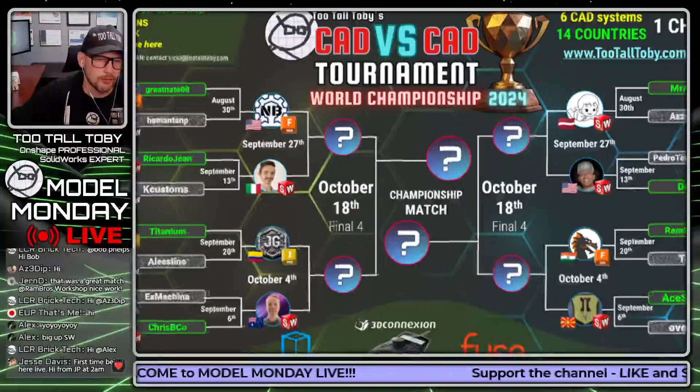We had Titanium coming through with Autodesk Inventor. We saw Ram Bros, who's in the chat here today, coming through with Fusion 360. Both matches went to 3 matches, so both were really good, really fun to watch. I was very thankful to have been a part of that and to have been able to do co-commentary with Neil Cross, who's an Autodesk expert elite. So it's pretty cool to have him in the booth with me.

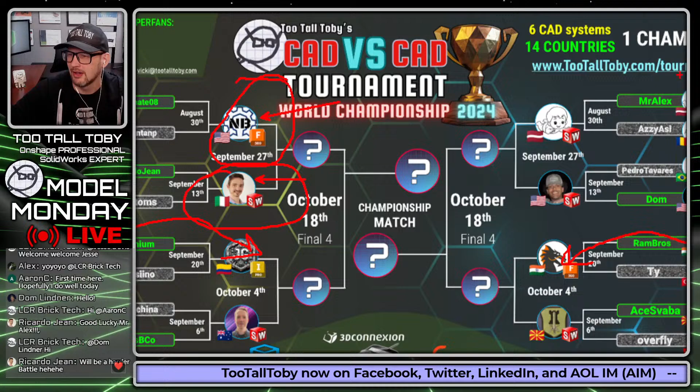That's going to move us forward to this Friday, September 27th. Great Nate 08, who's the #1 seed, going against Ricardo Jean, who I'm definitely rooting for. I know we're not supposed to play favorites here in the commentary booth, but Ricardo, I'm rooting for you, bro, you got to bring this home. So good luck to both of our runners here, it's going to be an awesome match regardless. Ricardo is so fast, super speedy, puts up some of the fastest times, but Great Nate 08 is a Fusion 360 wizard and was #1 seed in the tournament.

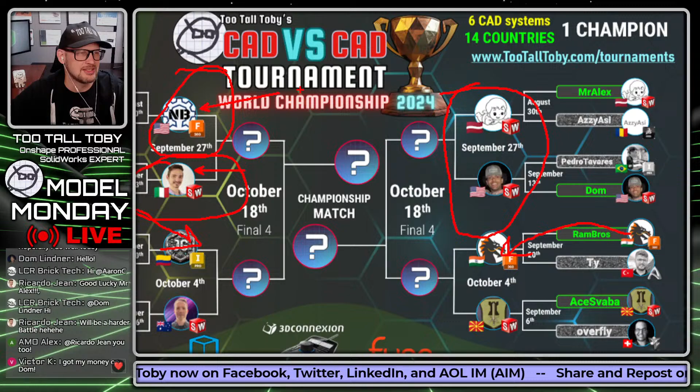So this match this Friday is going to be absolutely epic. And then we got Dom versus Mr. Alex, it's going to be another great match. What a great Elite 8 this thing is shaping up to be. I'm very excited to see the matches this Friday. If you guys don't have it on your calendar already, you can visit TooTallToby.com/calendar and get all those dates added in.

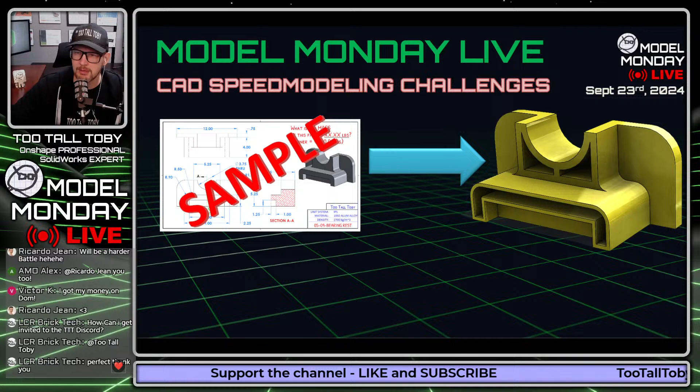All right, guys, I know what you're here for. You're here for the Model Monday Live 3D CAD speed modeling challenges. How fast can you take a 2D drawing and turn it into a 3D model? Well, you can prove the answer to that question by doing just that, calculating the mass, and then entering that mass in the YouTube chat. This is what we do every Monday on Model Monday Live.

It's a lot of fun. It's a great community. And the basic rules are that you can use any 3D CAD package as long as you can input density and output mass. All CAD are welcome here at TooTallToby's Model Monday Live. Make sure you use the specified precision that's shown on the print, and the first person to answer correctly in the chat will be declared the winner.

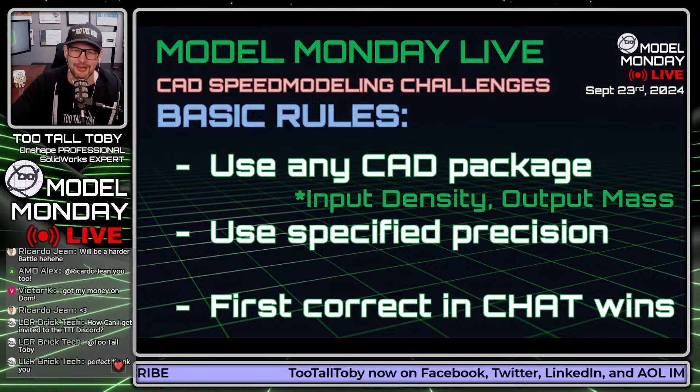Of course, if you're not sure if your answer is correct, you can always correct your answer. You can always change your answer. You can enter more than once, more than twice, as many times as you want here on Model Monday Live. Whatever your final answer is, that's the one that we're going to take.

The units that we use here on Model Monday Live are shown on this screen. If you're here for the first time, take a moment, grab a screen capture. That way you can make sure that you get the correct units, the correct density when you're creating your models. So make sure that you get those correct, all that information correct. Take a screen capture, then you'll have it for the future.

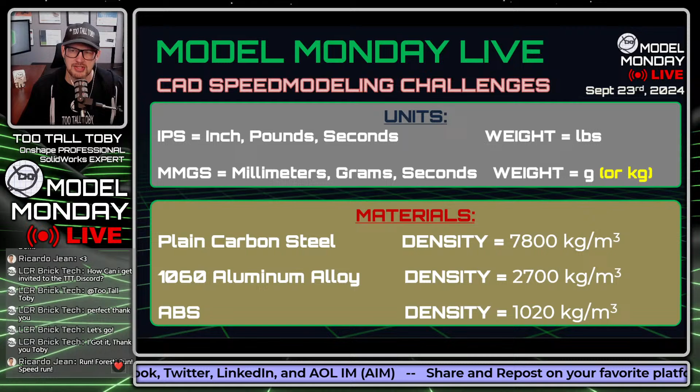LCR Brick Tech was able to get into the Discord. Good job, LCR Brick Tech. Good job. He's in.

Guys, the advanced rule is this is meant to be fun and good-spirited. Occasionally, I will make some mistakes. I will sometimes do things like forget a dimension on the print or have the wrong density listed, stuff like that. If that happens, then you know what? We just cracked it together. We figured it out together. That's how we do it.

And the Ivan exploit is permitted. I'm working on a video with Aaron C., one of the super fans of the TooTallToby channel, great friend of the channel. And we're almost done with the final edits on that Ivan exploit video. It's going to be coming out any day now, so be on the lookout for that. I just had to send the raw video over to Aaron to get him to do some color grading, and then that video is going to be out. So really looking forward to that Ivan exploit video. And a huge thanks to Aaron C., who's helping me out with that one.

All right, guys, that's it. That's it for our warm-up here. As soon as I show this 2D print, you guys are going to attempt to turn it into a 3D model. So give it a try here.

Ex Machina says in the chat, ASMR, TooTallToby, let's go. I guess that means the mic sounds good today. And we got Aaron C in the chat, Aaron C is actually the one who helped us code the Venmo interface at TooTallToby.com/donate, so huge shout out to Aaron C in the chat, already coming in with an answer, he's speedy. And we got Eric Gauthier in the chat, haven't seen Eric in a long time. Hello, hello, old friend who uses Onshape and does mobile Onshape for the speed modeling challenges, pretty cool to watch. And we got Juliano Rafael in the chat, says I'm here for the first time, I use T. Nice, I use Onshape. There we go.

Is there any other way to see all your projects online and work online? Nope, there's no other, you got it. You got the one that you need, Juliano. That's the one. Juliano Rafael is locked in on Onshape.

All right guys, we see in the chat a bunch of answers coming in now. Aaron C says, first time I ever used the dome tool in competition. Nice, nice. Paul Marsamon coming in with an answer.

New name here in the chat. Welcome, welcome Juliano, welcome to the channel. Thank you for joining us here today.

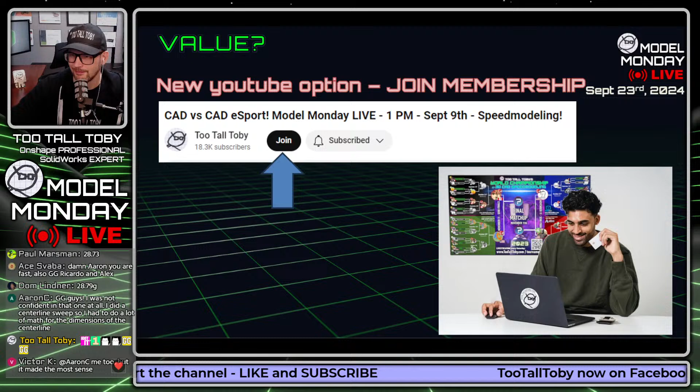Yeah, mine didn't even come in. Where's all my emojis? Oh, they came through. Yeah, they're good. It's weird, it didn't come through in the main chat for me.

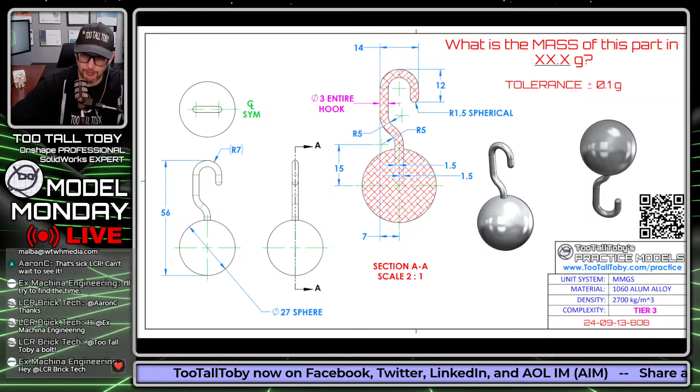Bob, 240913, Bob. Now why this model? Why are we doing a pendulum here, Pendulum Bob? Well, as you guys know, a couple of weeks ago we had a special model for Rich Penn because Rich Penn joined our membership program. And this week we had another member join, and his name was Bob. So I'm kind of doing a thing where the first 5 or maybe 10 people who join the membership program, I'm going to create a special practice model for you.

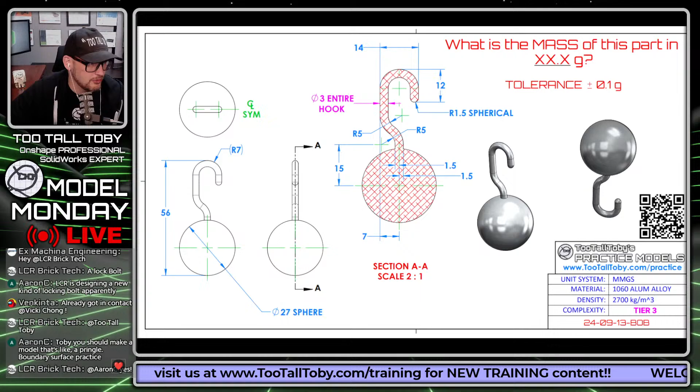Let's see who came up with the first correct answer. I know Aaron C was pretty speedy in there: 28.7 grams. Is that correct or incorrect? We don't know yet, let's find out. Ricardo Jean, hot on his heels, 28.7 grams. Victor K, the world champion, 28.7 grams.

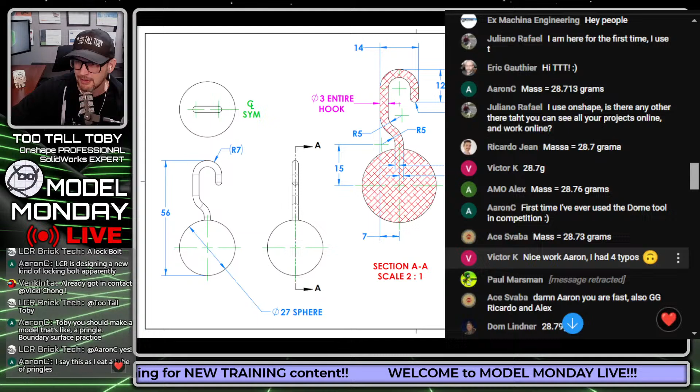Mr. Alex in the Elite 8, 28.7 grams. Ace in the Elite 8, 28.7 grams. Dom in the Elite 8, 28.7 grams. Wait, is Dom in the Elite 8? I think he is, hold on... yeah, I remembered, didn't have to go back and look. Let's see here, what else we got? Ram Bros in the Elite 8, 28.7 grams. This truly is where the world champions come to work out their material.

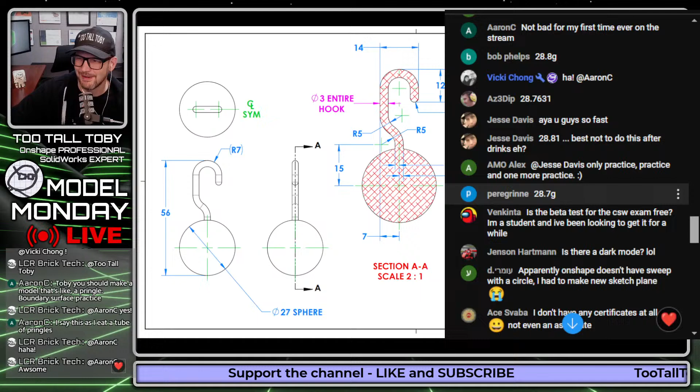Omri, 28.8 grams. Bob Phelps, 28.8 grams. AZ3 DIP, 28.7 grams. Jesse Davis, 28.8 grams. Peregrine, 28.7, nice. Jern, 28.7. LCR Brick, 1064 grams, yeah I like it, heavy, very nice. And Fewer Frosh, 28.6 grams. Very nice. And LCR Brick Tech, 2875 grams, 287.

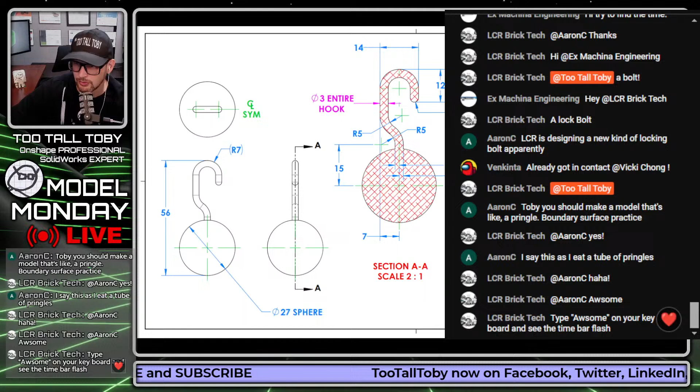You can answer as many times as you want, guys, don't worry, you get as many shots as you want. All right guys, what is the correct answer for this one? The correct answer is 28.7 grams. So GG to Aaron C, very nicely done, Aaron, very speedy. I'm impressed, we gotta get Aaron C back in the tournament. GG, well done my friend, and congratulations to Aaron C, smashing that one. Well done.

Now guys, speaking of the tournament, we had a leftover model from the Sweet 16, one single leftover model, and guess what, that's going to be our model today. So here we go, this second 3D CAD challenge amongst you chat pros. Many of you are in the tournament this year, but not Aaron C, but he smoked everybody, let's see if he can do it again. Here we go, this next CAD challenge begins in 3, 2, 1, go.

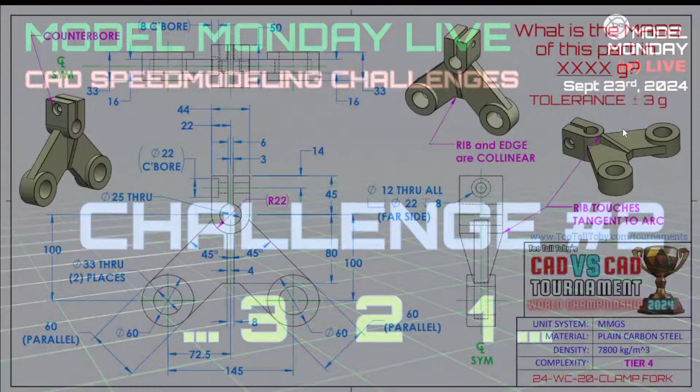What is the mass of this part in XXXX grams? You guys can see here, this part is called clamp fork. I like this one, clamp fork. And this is MMGS, plain carbon steel, 7,800 kilograms per cubic meter. Tier 4 model, symmetric, it's got a counter bore, it's got some Toby notes, as Rich Penn says, Toby notes. Good luck to you guys, this is kind of a fun one.

Omri in the chat says, I wonder where that extra 0.1 grams were. The model had a tolerance of plus or minus 0.1. I think it's probably when you sweep, if you do the merge tangent faces versus not merge tangent faces, that's where you can get some variance because it converts the path into a spline. That's usually where we see that variance on a model like that. That's the problem with sweeps, if people are doing merge tangent faces, you can get a little dicey, get an unfair result. We had that happen last year in the World Championship with Aaron and Victor and Ivan the Reasonable.

So good luck guys, take a screen capture so you can model this while I'm modeling, actually. I want to make sure we have enough time to show off this double CAD project, so take a screen capture. Good luck with this model, tier 4 model, a little bit more complicated. It's got that Toby note: rib touches tangent to arc. What's that mean? Oh, that means we got a plus or minus 3 gram tolerance. That's what it means.

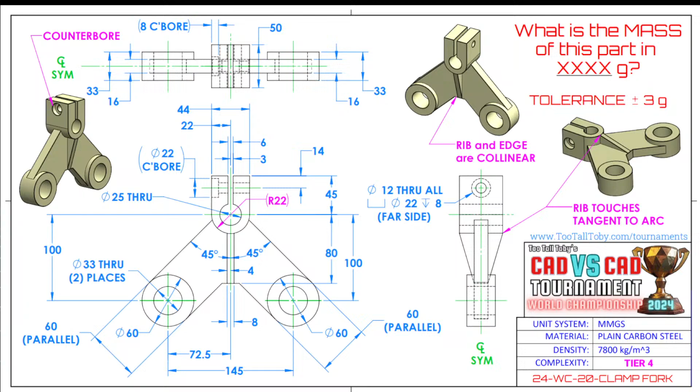Good luck, everybody. Good luck. It's going to be a good one.

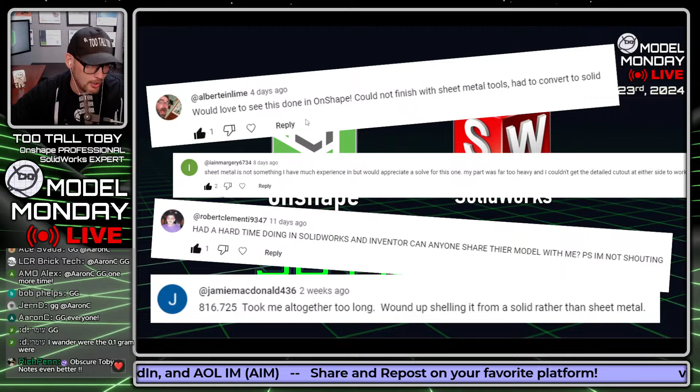Well guys, let's see if we can solve this thing. I'm not sure who's using Onshape, I'm not sure who's using SolidWorks. So you know what we try to do here at TooTallToby? We try to give you everything that you could possibly ask for. Let's see if we can speed model this in Onshape and SolidWorks in the next 20 minutes.

So normally what I do in a model like this is I really talk through my game plan. I'm not going to quite go that deep with it this time, I'm just going to jump into it and do the live solve. But I will say this: when you're looking at sheet metal, it's a really good habit to get into thinking about how you could create thin wall geometry and extrude it to create your first feature.

So if I were to create two lines here, a line going down, then a line going forward, I could extrude that as a thin feature or as a sheet metal feature. That's going to really set me up for success.

So the question is, what does that dimension need to be? I think that dimension needs to be the dimension to these two vertices. I think what I need to do is make my first sketch a line here, and then extrude it out to the depth of those two vertices, which is 80 millimeters. So this dimension here, 80 millimeters, that's going to be my first sheet metal feature.

And if you can get in the habit of looking at a complex sheet metal design like this and figuring out which feature can be created and extruded out as your base flange, you're going to be in great shape.

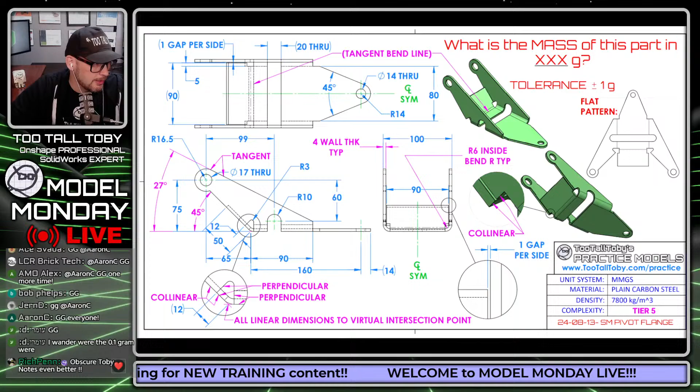If I look at this from the side, that's going to be my profile that I'm going to extrude out. And really, a lot of times the magic in sheet metal is figuring out what the depth of that profile needs to be. But it's kind of the same idea here.

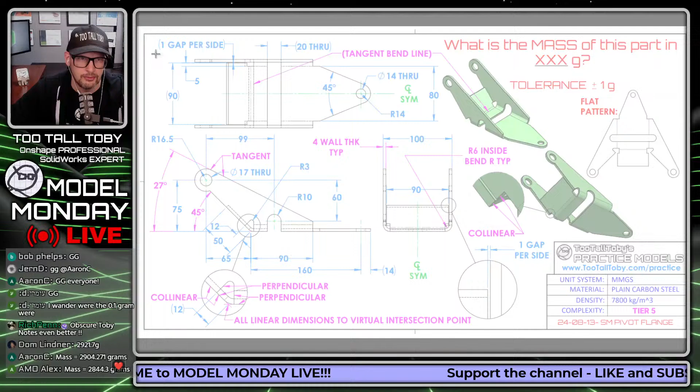We're looking at this model and we're trying to figure out where we can sketch a couple of lines and then use those lines to create a base flange tab. And if we can figure that out, that's going to really set us up for success in sheet metal, regardless of whether you're using SolidWorks sheet metal or Onshape sheet metal.

So I'm going to take this and move it over to my second screen, and we're going to do a live solve here using Onshape. Let's jump into it here in Onshape.

We're going to say create document. We're going to call this 24-08-13-SM pivot flange, this way it will be searchable. I am going to make this a public document, so later on, if you guys want to see this actual document, you can search for it, because everything we do in Onshape is online.

It's entirely in the browser, so you can search for this whole setup when you're done.

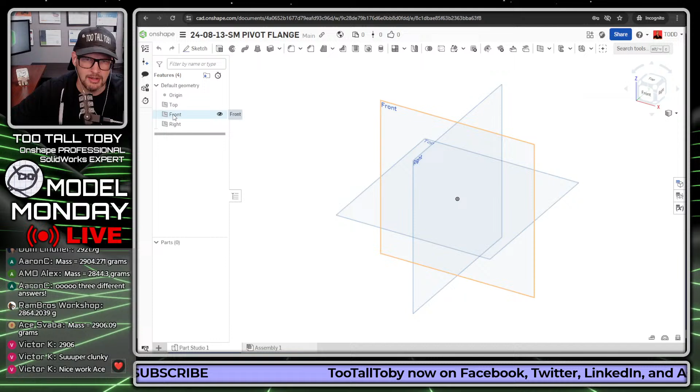What I'm going to do is go into my workspace units and make sure I'm working in millimeters and grams, and I am. So now I'm going to go to the front plane, press S key to begin a sketch, get normal to it with the N key, then S key again.

I'm going to create a line that comes down here at a length of 50, and then a line that comes across here. This distance is going to be 160, plus 14. Where I'm getting that number from is this dimension here.

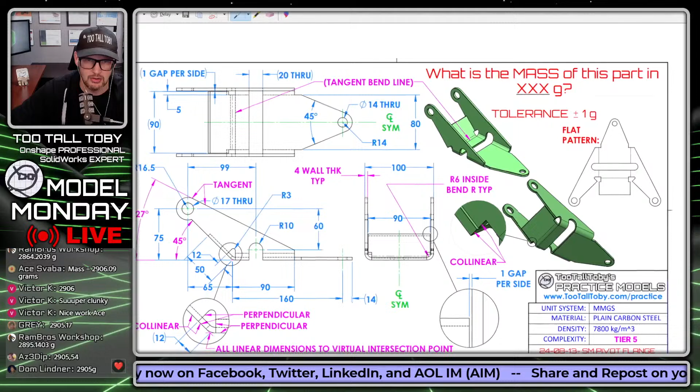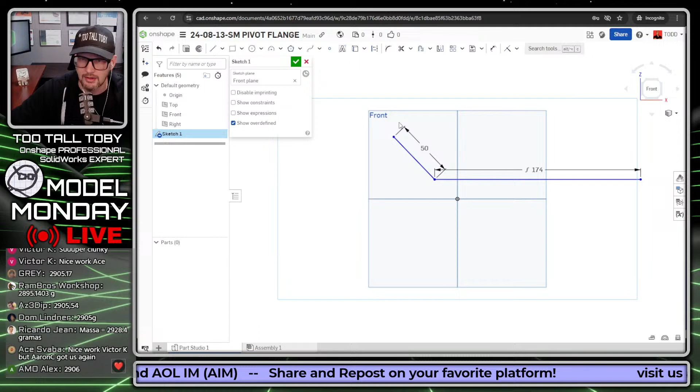So 160 plus 14 — I'm going from this vertex. It says all linear dimensions are to the virtual intersection point. So this dimension here, 160, is from the virtual intersection point, and this dimension here, 14, is the radius sticking off from that center line. So I'm going 160 plus 14 to get the length of that first line — 160 plus 14, 50 up in that direction.

And then we're just going to take this point that's intersecting there and drop it on there. We're going to go to... you know what, guys?

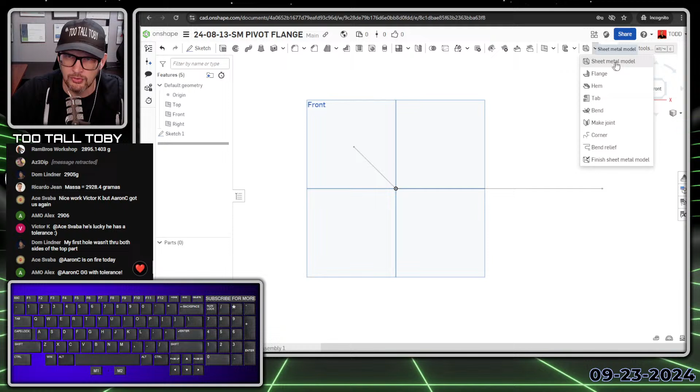Then I'm going to go to my sheet metal tools in Onshape. Your sheet metal tools are found up here — here's the fly-up menu for all your sheet metal tools, sheet metal model, and this is going to be an extruded sheet metal model. So I'm going to pick this here, and that's going to get extruded.

The thickness of the sheet metal is 4, the bend radius is 6, and there's a button here you can use to reverse direction. So I can reverse direction to have that sheet metal go to the other side.

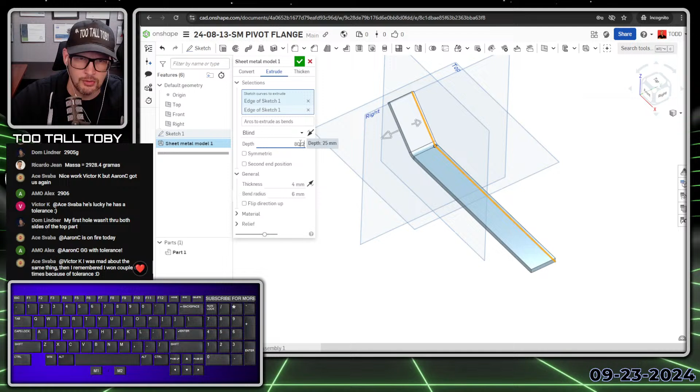The final dimension I need to figure out is what the depth of this extrusion is. Well, that's going to be my 80 divided by 2 — that 80 dimension we identified earlier as we were setting up this model. So that's going to be my very first feature.

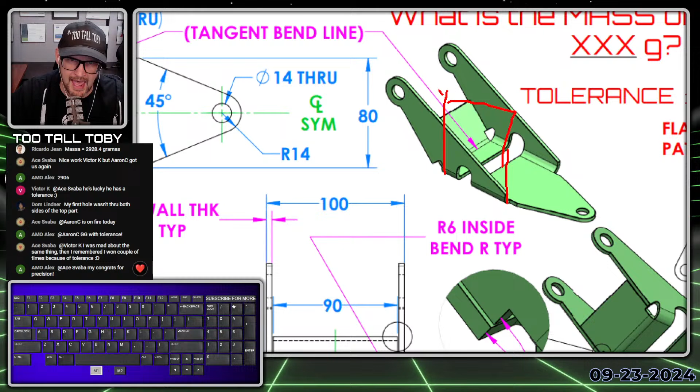Now for my second feature, I'm going to pull this flange off here. Now, I'm not an Onshape expert — I am an Onshape professional, but not an expert. I don't think you can pull this flange off and edit the sketch all in one command. So I'll probably need to bring this flange off straight, then add additional geometry with a tab, and maybe cut away extra geometry on this side with a cut extrude. That's fine, we can do that — it takes an extra step, but it's not a big deal.

So I pick this edge here, S key. I've got my edge flange built into my S key menu in Onshape to save some time — very helpful.

When you're creating flanges in 3D CAD, the main thing you have to recognize is that the flange can begin at different locations. You see how when I choose these different options here, the flange pulls off the solid material in different locations? You've got to get that right, because we're trying to create it so that it's starting at that 80 millimeters and then bending out.

So in Onshape, that's called the hold line. Now for the height of this flange, similar to what I did with the length of that first line, I'm going to identify this 75 millimeter dimension and the 16.5 — 75 plus 16.5 is going to give me the max height of that flange.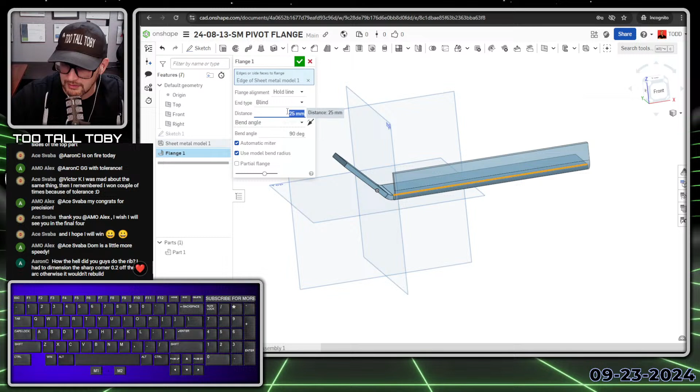So we're going to come over here and say that we want that height to go to 75 plus 16.5. And there we go — that gives us that flange.

Now we're going to begin a new sketch on that flange face, and we're going to create the remaining geometry for this area of the model. So this is going to be that 16.5 times 2. The height of this is going to be from this point here to that origin, or to that point there.

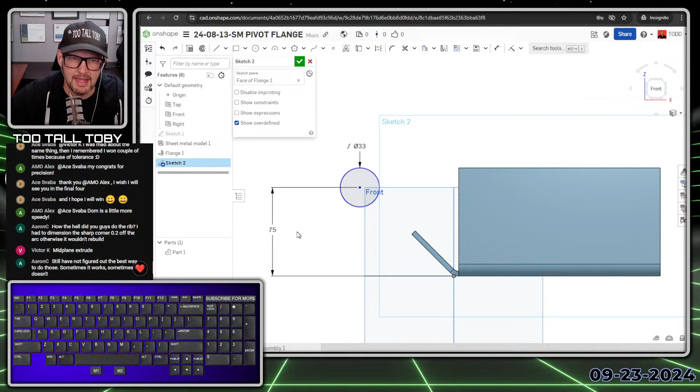It's going to be at 75. Really, I should right mouse button on that dimension and say change this to a driven dimension, because this and this should be tangent. So I'll press T to make that a tangent relationship, and then I just need to define the location in this direction. So the location in this direction is going to be 65.

There we go. And then I can add some additional information here. I like to add additional information into my sketches in Onshape. I think Onshape does such a good job of letting you work with multi-body, multi-contours. So really, I could just sketch all this geometry down to here in that one sketch in Onshape, and then kind of tidy it up as I need to.

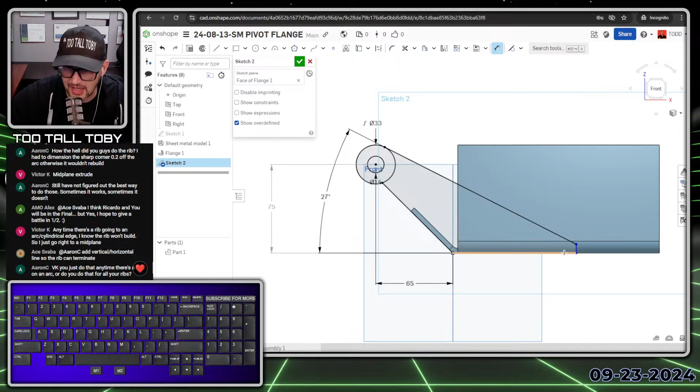So for example, this is going to be collinear. This is going to be tangent. And then this is going to be at an angle here of 27 degrees. So you can see how the sketch is really coming together. This length here to that flat spot is going to be 90.

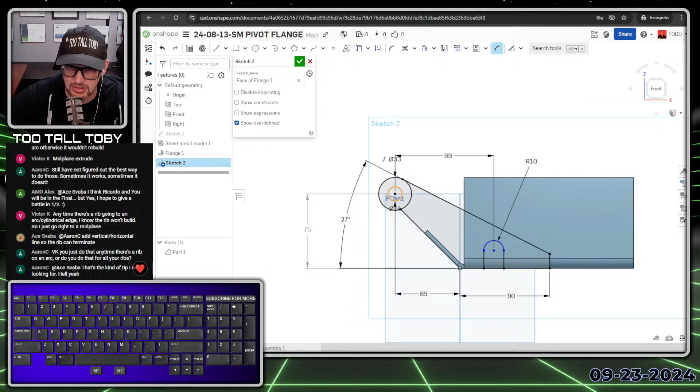I could even incorporate the kind of tombstone shape here in this first sketch, since that tombstone shape is related to that hole. It's defined by that hole. So this tombstone shape here, it's got a radius of 10, and then it's got a distance dimension from that hole to the tombstone at 99, and it's got a height dimension here to, let's see here, 60.

And so the final thing I need to do with this is just create that extra geometry that's kind of sticking up and over here. So there's a line that comes up, comes back and touches the end point. There's a radius here of 3, and then there's a vertical line that goes up and connects to this. And that is going to be tangent.

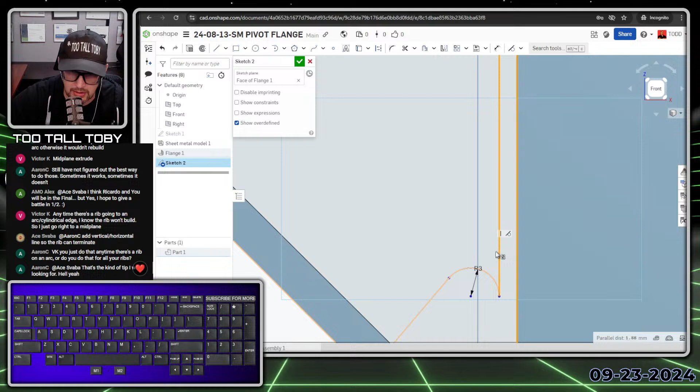So we'll make that tangent. This is going to be collinear. This is going to be perpendicular. Not sure what the shortcut key is for perpendicular, so I'll just make that perpendicular like that. And then there's going to be a linear dimension here from this point to this line. That linear dimension is going to be 12 millimeters.

And that's all I think I need for that. I'm not sure if this needs to be closed off or not. I'll just close it off anyway. Like I said, Onshape is so flexible when it comes to this kind of stuff. So now I can exit that sketch.

I can actually choose in this region, and then I can press the S key and add my tab here. So on my sheet metal tools, I've got my... Oh, actually, I didn't add in all my sheet metal tools here in this profile. So we'll add that and that. And there we go. Now we've added that tab, that area that's sticking up and over to the top there.

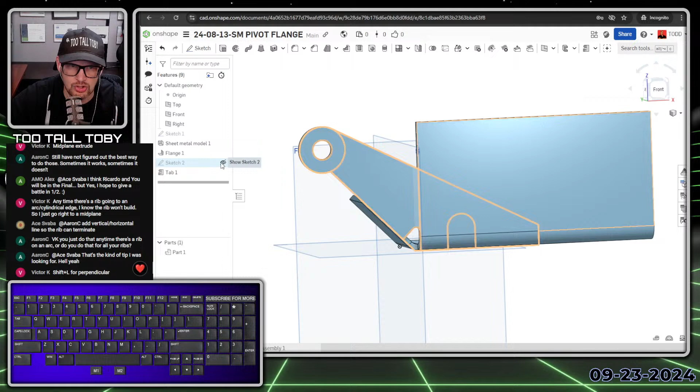And then I could just show that sketch, and I can actually pick this region here, and I can choose extrude cut. So features, extrude. And the cool thing is that with extrude cut, it not only cuts the solid material, it actually cuts the flange as well. So in this case, I'm only actually cutting this region here, but Onshape knows at that point to also remove the flange. So it's kind of some of that intelligent sheet metal functionality built in there.

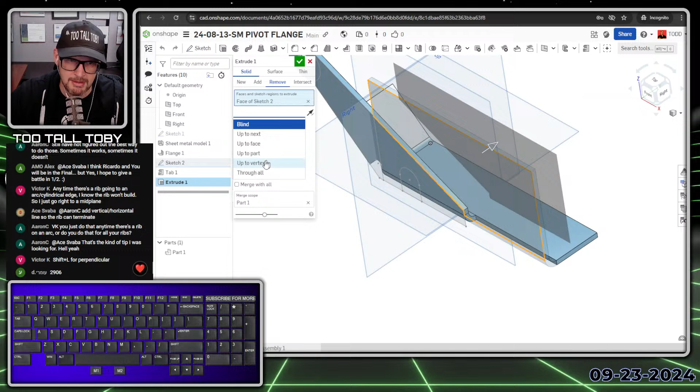So this could maybe go up to vertex, and I could just go up to this point here, and that cuts that geometry away. And then I could take this region here, and maybe this region here as well, and S key extrude, and that's going to be a through all.

So maybe I pick this face here, begin a sketch, do a rectangle, something like so. And then I could take this edge of the rectangle and this edge here and make those coincident. And then I could add in my dimension that goes from here to here. That's going to be my 90 over 2.

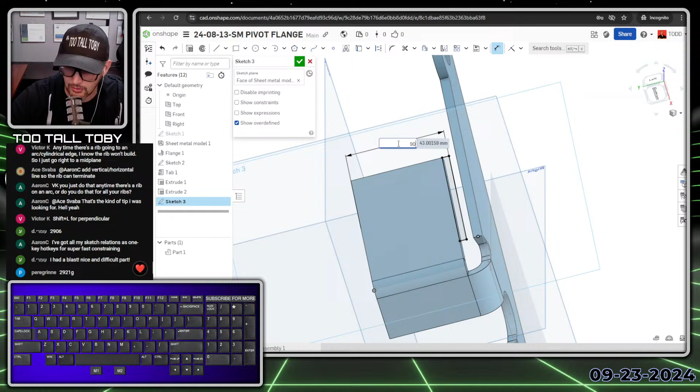And then I can use that region, take that region there, and go in here and say I want to add a tab, sheet metal tab. And there we go, that fills out that region.

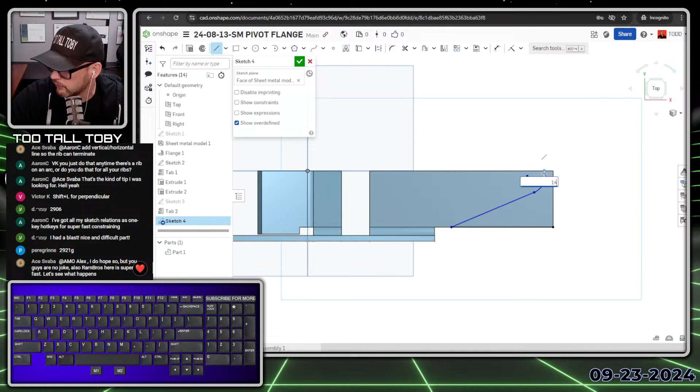So now the final, second to last feature I need to create is the cut extrude to remove this additional material. That's going to look something like this. Come back and touch the end point here, come up and around, that's going to have a radius of 14 I think. Yep, and then that's just going to come straight over like so. We'll merge those points, we'll say that this and this are tangent, and we'll say that this has an angle of 45 over 2.

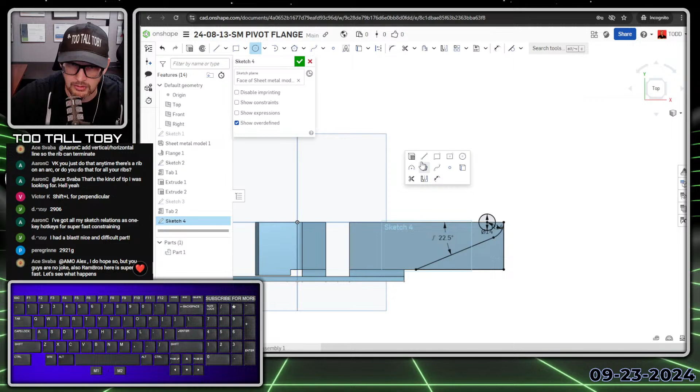And then we'll say that we're going to add a hole here, and that hole is going to have a dimension of 14. Now we're going to extrude cut, remove that material, we'll just make that through all. There we go, and now we're ready to mirror this thing.

Hopefully I got all the dimensions here, I feel like I'm running in the tournament here. So we're going to mirror this thing about this face, and we're going to say that's going to be an add and merge.

Now if we look at our sheet metal environment here in Onshape, we can see that the flat pattern looks very similar to the flat pattern from our print. So that's at least reassuring, we got basically the same geometry there.

So now we can go down here to where it says part 1, right mouse button, say assign material, and we're going to assign the material from the TTT custom library, that's going to be the plain carbon steel. Then we're going to go here to our mass properties and click on this.

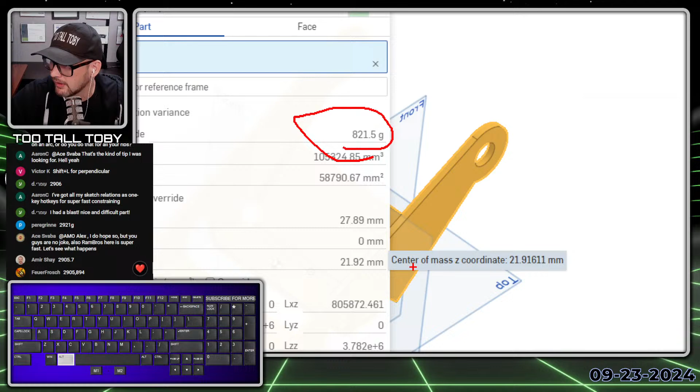And we're coming up with 821.5. That's not right, I missed something. 821.5 is not right, let's see here. Did I miss the tangency up here? This thing looks a little funky, see, that looks almost lumpy up there.

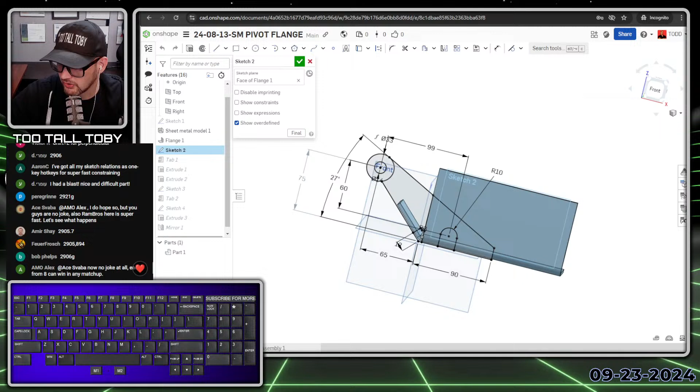Let's go back to that sketch, see if that's what the issue is. This and this, nope, the tangent. Let's see here. I missed the dimension somewhere, guys. So what do we do when we miss a dimension?

Well, we may have to forego the Onshape live solve, which is okay, we can forego that. Let's see, so this is...

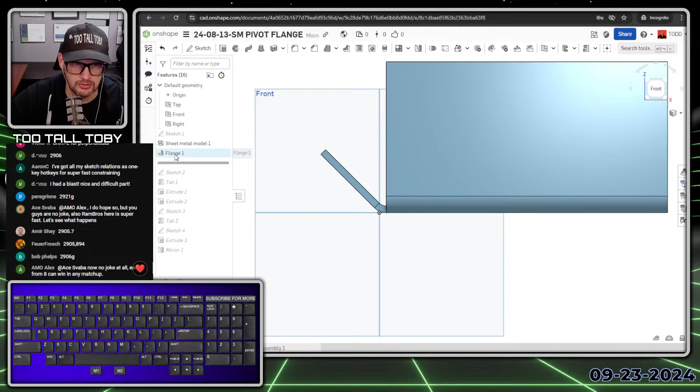174, yep that's right, 50, 45 degrees. We'll just go one feature at a time. The flange direction is the right way, the sheet metal feature is 4 and 6, that's the right way, coming out to 40, that's right, this flange going up here.

91.5, yep that looks right. 75 plus 16.5, yep that looks correct. We've got this new sketch that we were just looking at: 10 millimeters, radius of 3, perpendicular, distance of 12 there, 14 for that hole, 17 for that hole. There we go.

And let's try this again. And 817 grams, let's go.

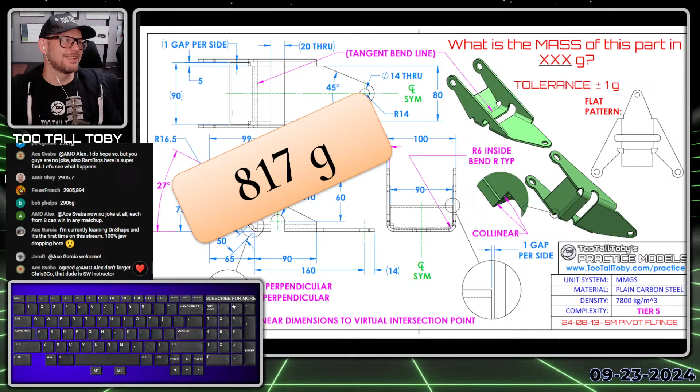I'm not sure if that's correct or not, let's find out if that's correct. Is 817 grams correct? Yes, it is, 817 grams is correct. GG to Toby, 817 grams is correct. So that's what I would put in the chat: 817 grams, GG Toby, let's go.

So that's a bit of a speed run. I know it's a little bit faster than what we normally do, but if you were struggling with that model in Onshape, I hope that you appreciate that live solve.

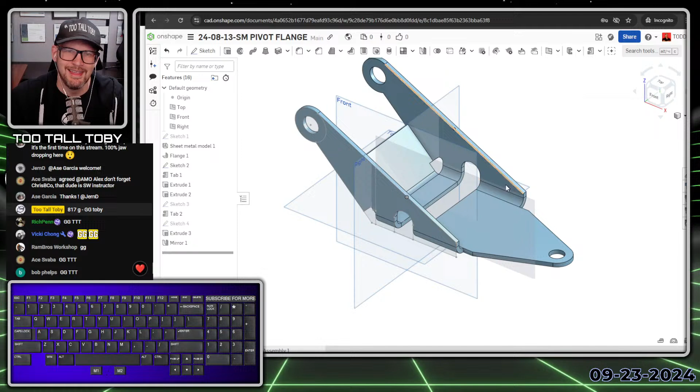And now let's move on. I think we do have time, let's move on and try to solve this thing using a different CAD system. We're going to do this as a double CAD, a little compare and contrast here using SolidWorks. So all the same methodology as far as deciding on a game plan.

This time I'm going to start a new part here in plain carbon steel using millimeters. So I started with a template, I've got the correct units here ready to go. I'm going to go front plane, begin to sketch, orient my view.

And just like in Onshape, we can go here to 50, we can come across here to a distance, horizontal distance of 160 plus 14, let's go. Take this point, drop it on the origin, S key, smart dimension, S key, just like Onshape. So SolidWorks and Onshape really behaving similarly.

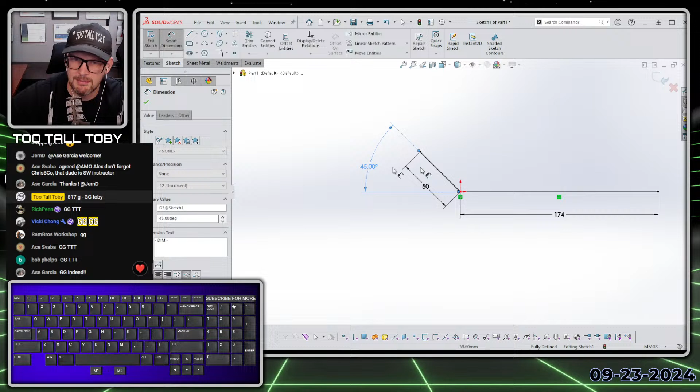Makes it very easy if you're ever trying to go from SolidWorks to Onshape, makes it very easy to make that transition.

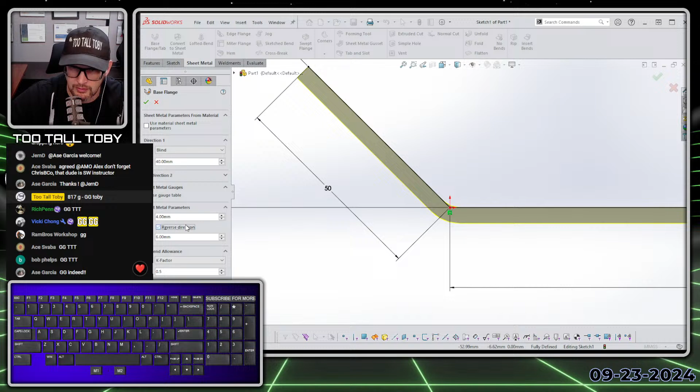I'm going to go here to my sheet metal tools and say base flange tab, bringing this out to a depth of 40 millimeters. I'll say I want the wall thickness to be 4 millimeters, the bend radius to be 6. If I go to a front view, you see that just like in Onshape, we can reverse the direction into the correct direction based on the print.

We hit the green check mark, and now we're going to take this edge and go into an edge flange command. With the edge flange command, just like we saw earlier, you can define the position of the edge, and that's really the most important thing here. We can define if we want that edge to be all the way on the inside, sort of on the inside, or on the outside where the bend line is. That's where we want that edge to be.

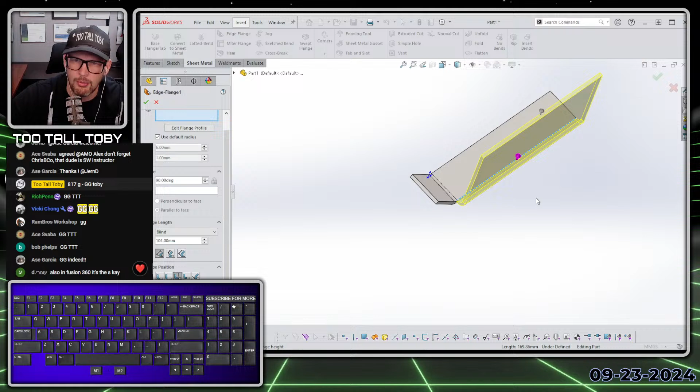This is where we start to see some deviation between SolidWorks and Onshape. Here in SolidWorks we can choose this button, Edit Flange Profile. Let me turn off that chat, it's kind of getting in the way. When we use that Edit Flange Profile button, SolidWorks takes us into a sketch mode so we can actually start sketching to create the geometry for this flange.

There's one thing I noticed that's a little bit frustrating, and I'm not going to go through the whole process of what I experienced myself. But one thing I noticed is when you've got multiple contours in SolidWorks, this box up here just doesn't work. You can see it says the sketch has intersecting contours, and that's a real bummer because being able to set this up with multiple contours can really save you time later. We saw that in Onshape in the earlier demonstration, but okay, that's fine — the sketch has intersecting contours.

So I spent a lot of time going through here adding smart dimensions and things like that. I had a bunch of smart dimensions in here, everything was laid out perfectly. I came up here and it says the sketch has intersecting contours. I tried to click back in here to move one of my dimensions, but the dimension wasn't activating when I tried to move it. So I just pressed escape, and SolidWorks kicked me completely out of that flange sketch. I spent probably a good couple of minutes getting the constraints and dimensions in place, just to end up losing my entire sketch, and that was really frustrating.

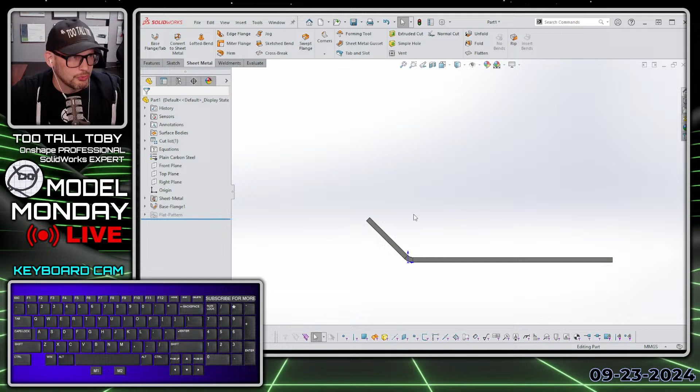So just something to look out for, all of you out there doing sheet metal in SolidWorks — be careful, don't hit escape while you're in that box. It'll completely cancel you out and you'll lose all your work.

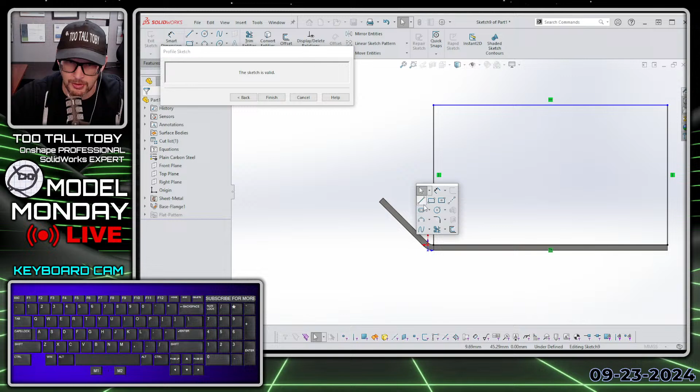So let's try this again. I'm going to say that I want this to be bent to the outside, and say edit flange profile. I'm going to get normal to here, and make sure this flange profile looks good. This flange profile is going to have a line that comes up here, just like we did a few moments ago. This will have a radius of 3, we'll bring it down like so, say that this is coincident, and say that this is tangent, and say that this is perpendicular.

Then we'll create our circle up here. This is going to have a radius of, I think it was 16.5 — so 16.5 times 2. We're going to have another circle inside of here with a diameter of... whoops, I'm doing my auto dimensioning out of order because I was in Onshape a second ago. We're going to have a line that comes down here, so this comes down and then ends up coming straight down like so. And another line that comes down here all the way to this point, and we'll say that has a perpendicular or collinear relationship, and a distance relationship of 12.

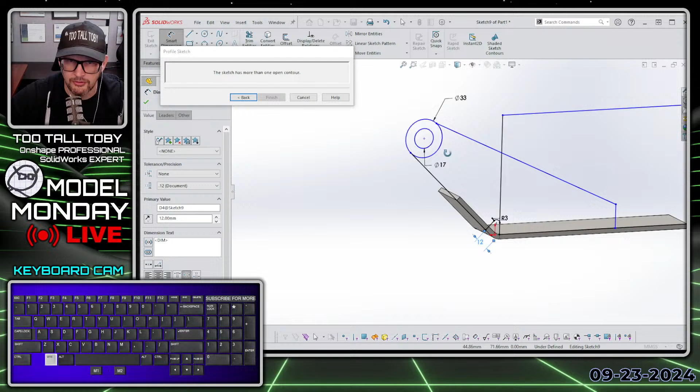We'll say that this is going to be at a location relative to that intersecting point, very similar to what we did a few moments ago. This is kind of a review of what we did — we're just doing it with a different CAD system.

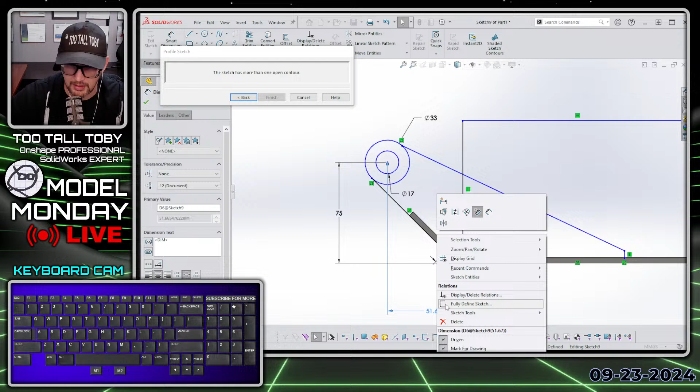So that could be driving, and that one's going to be 65. Okay, and then this is going to be, pick this one, hold control, pick this one, tangent. And this is going to be at our angle. How are we doing for time?

152. Feeling the pressure. Okay. And this one is going to be...

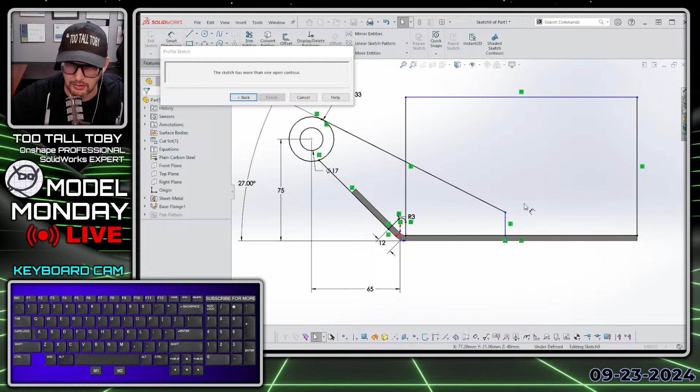Oh, okay, good. I have that vertical line there already. So this is going to come over from here to 90. And the rest of this stuff can just be kind of trimmed away. So trim away all of this. Trim away this. Love that power trim in SolidWorks.

And trim away. So currently you see it says the sketch has more than one open contour. So if I just trim away this one, now it says the sketch is valid.

So you can see how in that one sketch we were able to create the additional geometry, but you also saw how it was kind of limited because we weren't able to create the multiple contours. Definitely an example of the different CAD systems having kind of pros and cons, depending on what it is that you're trying to do, what the situation is that you're in.

So this one here, this would be our 90/2. And then that's going to get turned into a base flange tab in SolidWorks. Very straightforward, very easy to do that.

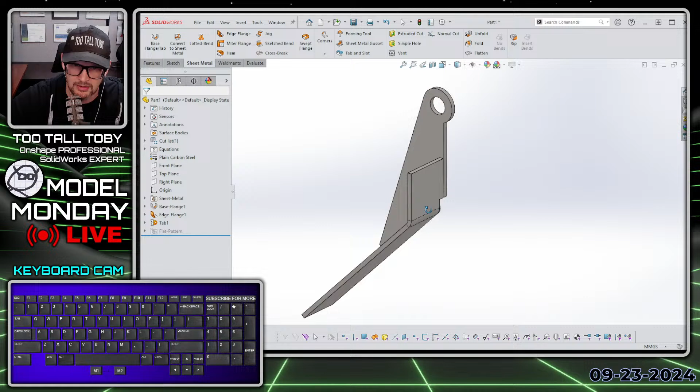We'll come down here to this face. We'll get normal to, and we will create our tombstone shape. So we can follow a very similar workflow to what we saw in Onshape. Both CAD systems, very similar, very easy to migrate from one to the other.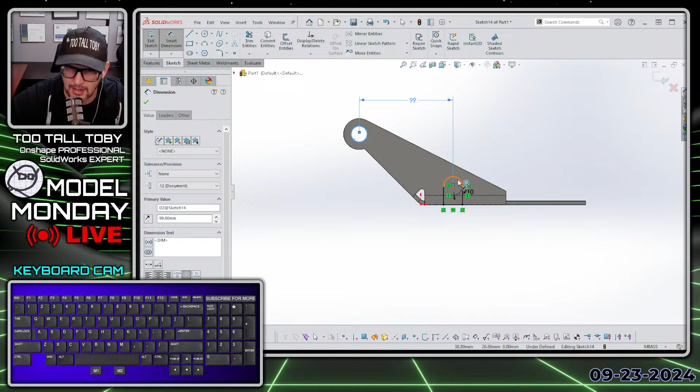We can say here that this is going to have a distance. One thing that I noticed in Onshape is that I wasn't able to just pick the center of the circle. It could be me, it could be that I don't know how to do it, but I ended up having to show the sketch to pick the center of that circle. So that might be a plus for the other column.

So we're going to right mouse button through all, right mouse button here. And then we're going to finish this off by creating that geometry out in the front. And that geometry out in the front is going to look something like it did in the other demonstration.

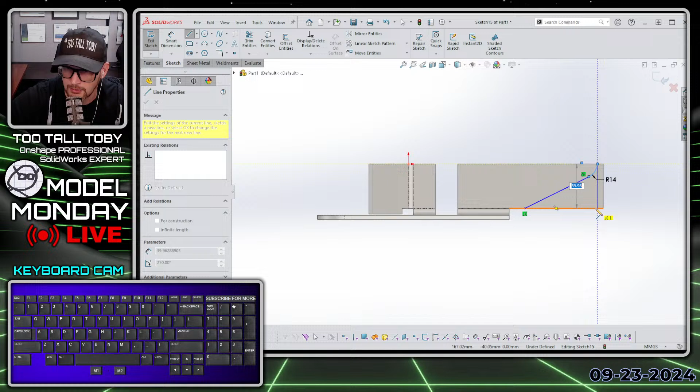So this will be at a radius of 14, and we'll come right over to there, come straight over, come down. Now we just need to line up some of this geometry.

So we'll put this on here. Whoops, don't like that too much. Make this guy 22.5 or 45/2. Make this and this tangent.

And then we should be able to get this thing to behave a little bit better. There we go, that's what we needed. And then final circle here. This is going to be at 14, S key, extrude cut, right mouse button, through all, right mouse button.

And now I'm going to pick this face, and then I'm going to come up here to my solid bodies folder, hold control, pick that body, and then mirror, and that automatically mirrors the body across.

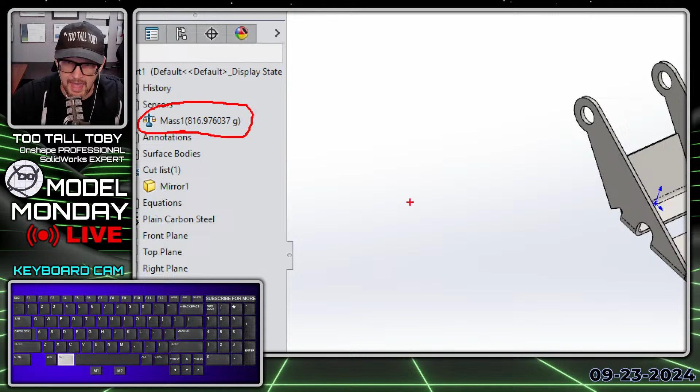So now we can take a look at our sensor, and oh yeah, 817 grams, 817 grams. And if we go back to our PowerPoint, we can see that in our PowerPoint, 817 grams. That is correct, that is correct.

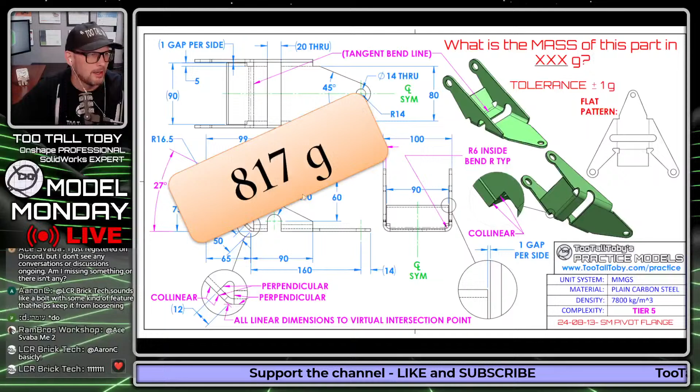A lot of people out there were asking about that model. It's kind of a tricky model, so I hope that that helps to demystify some of what's going on with that model. And with that, we're going to get into answer number 2.

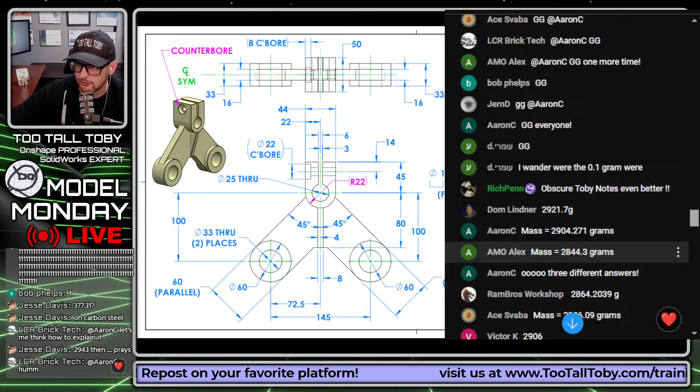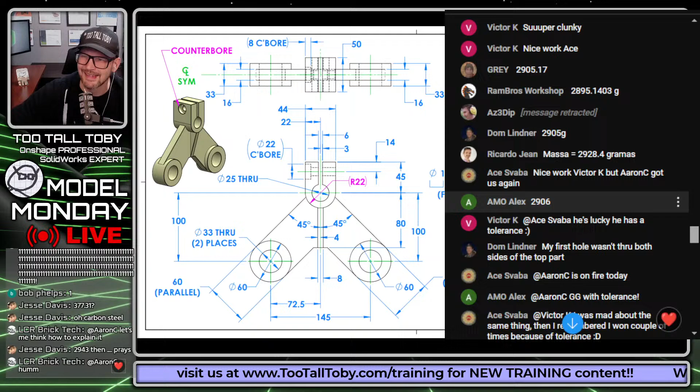Looks like the first answer was from Dom, he's in the Elite 8 as everybody knows and remembers. 2922 grams. 2904 from Aaron C. Mr. Alex, 2844 - I like all the different answers. Rambros, 2864. Ace coming in 2906, Victor K 2906. We got Grey coming in 2905 - nice to see you in here again, Grey. 2895 from Rambros, Dom coming in at 2905. Ricardo Jean 2928 - I love seeing all these different answers. Mr. Alex 2906. Aaron C is on fire today.

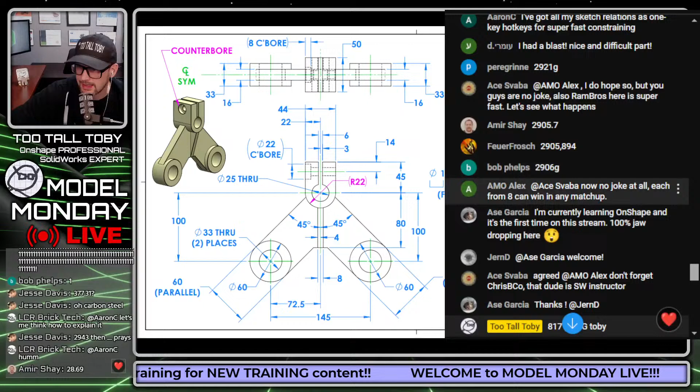Yes indeed, let's see here. How did you guys do the rib, the sharp corner? 2906 from Omri, Peregrinne 2921, Amir 2905, 2906, FeuerFrosch 2906, Bob Phelps 2906, very nice. And what else we got down here? LCR Brick Tech 2920, I like it. Make sure I'm not missing anybody. Jesse Davis 377... Jesse Davis 2943. Let's see here, Amir 2906.

Guys, the correct answer is 2906. So congratulations, I think it was Aaron C again with 2904, and it's 2906 plus or minus 3 grams. That looks like that is within tolerance to me. So GG to Aaron C for the clean sweep. 2906 plus or minus 3 grams, Aaron C at 2904 - that is within tolerance.

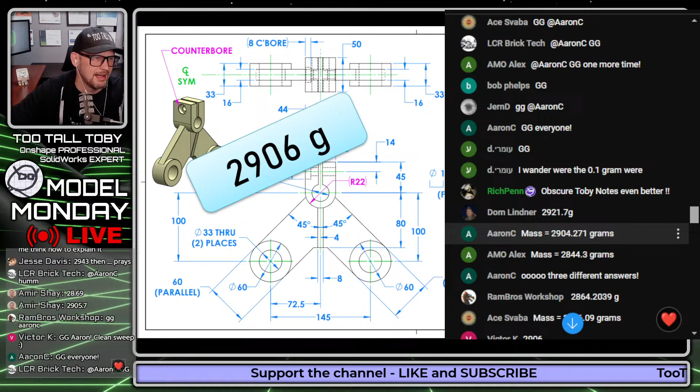Very nice, we have that tolerance there because of that rib. You guys see the rib there - the rib says rib touches tangent to arc. What does that mean? There could be a couple different geometric solutions for that, so the tolerance is meant to accommodate the variety of those solutions.

But wow, GG to Aaron C for getting the clean sweep. Well done my friend, GG to Aaron C, congratulations. We need an icon for that. GG to Aaron C, nice job Aaron C. I can't type for some reason, it's not... my typing's not working.

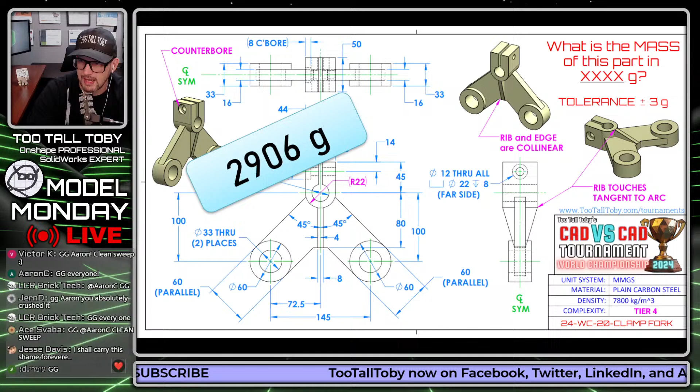I shall carry this shame forever. No, it's all good Jesse, you got this, got this bro, you're just getting warmed up.